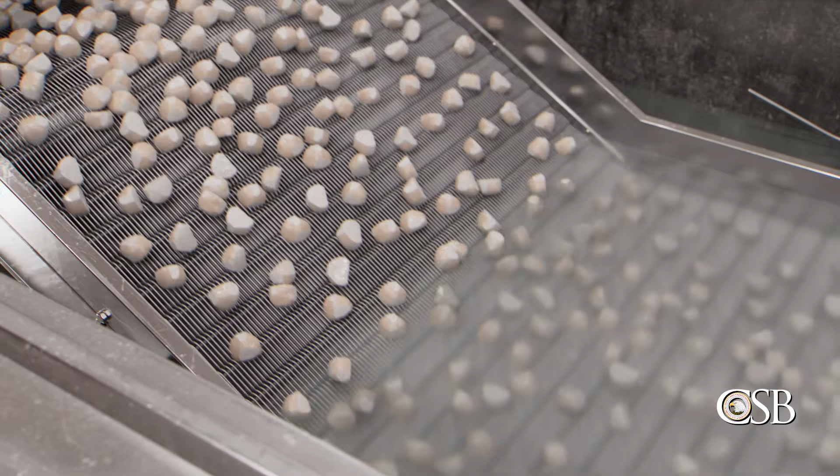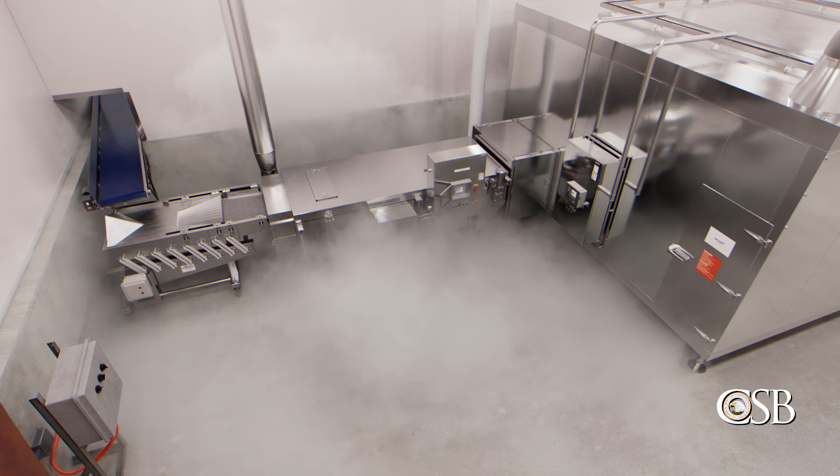January 28, 2021, the Foundation Food Group, or FFG, poultry processing plant in Gainesville, Georgia. A single part inside a liquid nitrogen freezer was bent, causing the freezer to overflow. Liquid nitrogen vaporized once it escaped the freezer, forming a deadly cloud inside a freezer room. Two people who were in the room at the time of the release died from asphyxiation.

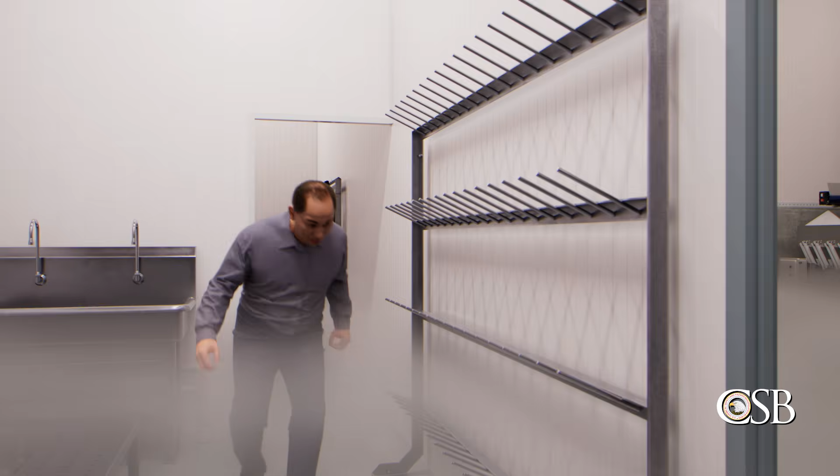Fourteen employees attempted to respond to the release. Four of those workers also died, and three were seriously injured. This preventable tragedy underscores the importance of safety leadership, systems, and training.

FFG lacked critical monitoring equipment and alarms. Management did not provide workers with adequate training or equipment to respond safely to a liquid nitrogen release.

During this incident, several workers tried to save their colleagues' lives without realizing that nitrogen had displaced oxygen in parts of the plant. While attempting to rescue their colleagues and evacuate, four workers lost their lives. In total, six workers died in this preventable incident, and three other workers and a firefighter were seriously injured.

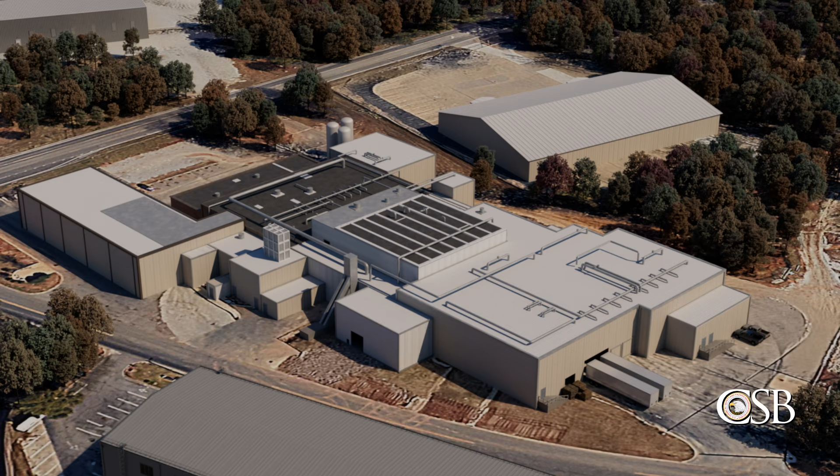Foundation Food Group owned four poultry processing plants in Gainesville, Georgia. The plant known as Plant 4 housed five production lines that made various cooked, partially cooked, and marinated chicken products. On each production line, conveyor belts transferred chicken through equipment such as ovens, fryers, freezers, and baggers.

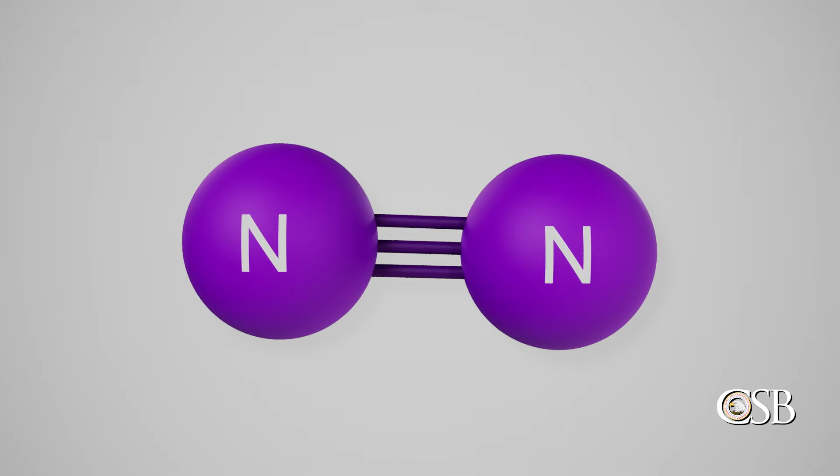Production line number 4 produced marinated, diced, fully cooked chicken that was then frozen using liquid nitrogen. Nitrogen is not hazardous in and of itself. It makes up about 78% of the air we breathe. However, too much nitrogen can reduce a space's oxygen concentration to unsafe levels.

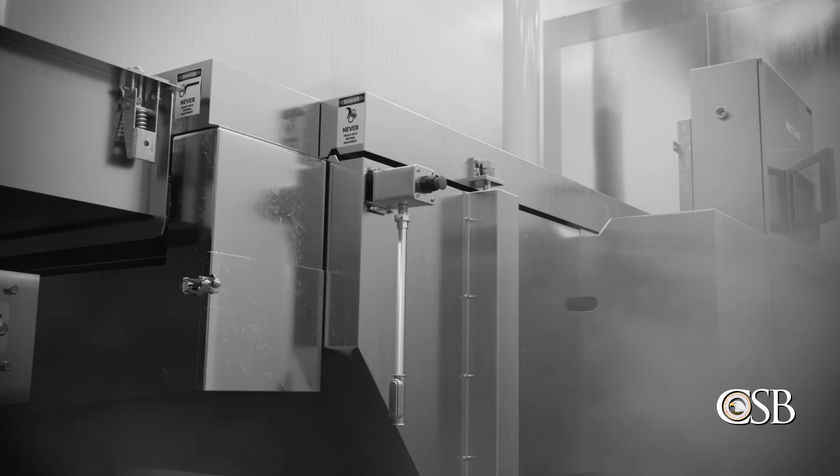When it vaporizes, liquid nitrogen greatly increases in volume. Just one gallon of liquid nitrogen can expand to roughly 700 gallons of nitrogen gas. Therefore, a large spill of liquid nitrogen can quickly vaporize, fill a room, and lower the amount of oxygen available to breathe. If the oxygen concentration is low enough, a human can lose consciousness in as little as one or two breaths. Prolonged exposure to insufficient oxygen can result in death.

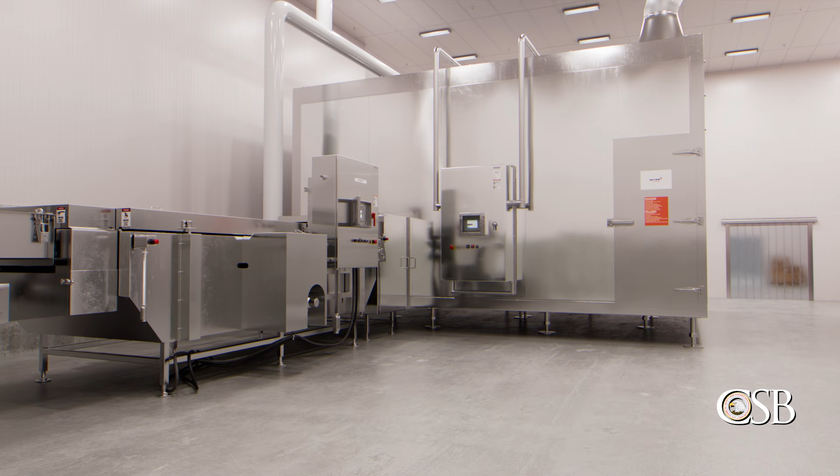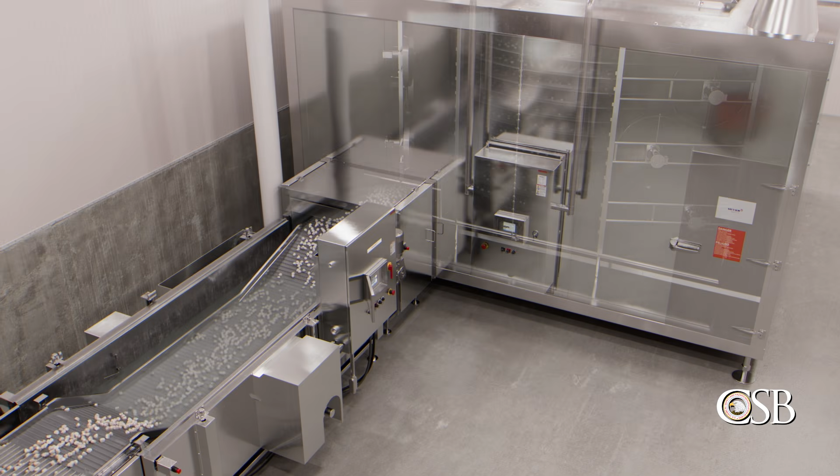At FFG, liquid nitrogen was used on line 4 in an immersion spiral freezer, which was comprised of two separate freezers connected together. First, a conveyor belt carried chicken into the immersion freezer, where it was partially frozen in a liquid nitrogen bath. Then, the chicken moved through a transition box to the spiral freezer. There, an internal fan was used to circulate vaporized liquid nitrogen around the chicken to complete the freezing process.

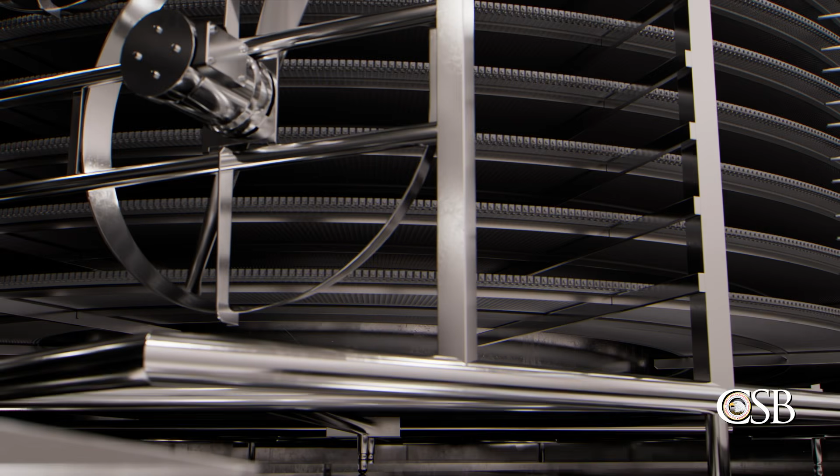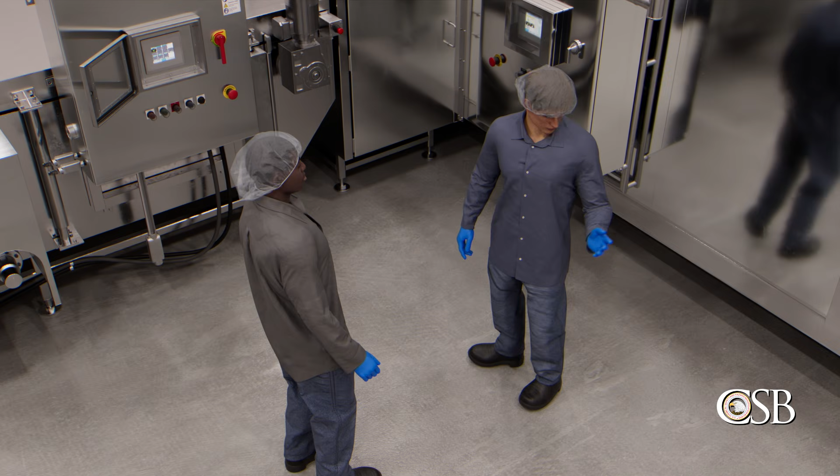The immersion spiral freezer was leased to FFG by an industrial gas products company called Messer LLC. Messer installed the freezer on production line 4 in mid-December 2020. But over the next five weeks, FFG experienced a series of operational problems with the equipment. Messer returned to Plant 4 on multiple occasions to troubleshoot those issues, which included problems with belt loading, liquid nitrogen level controls, and freezing.

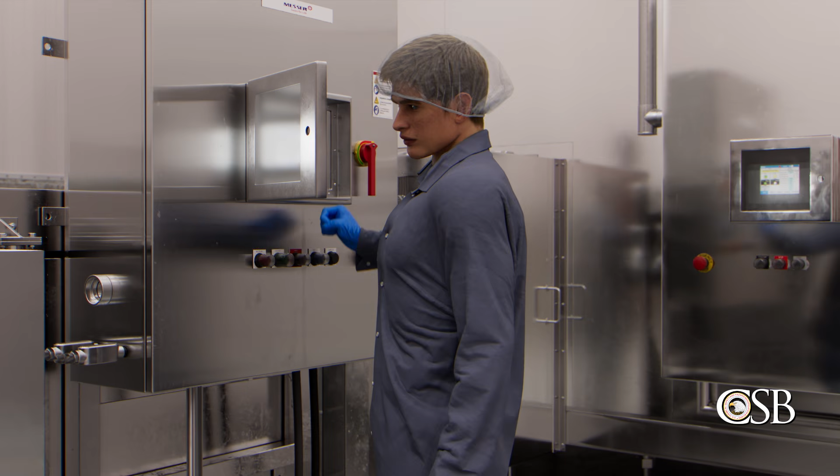But nonetheless, on January 26, 2021, FFG found that the immersion spiral freezer was still having problems. Soft, partially frozen chicken was emerging from the freezer. With Messer's guidance, FFG made several attempts to correct the issue, but two days later, the problem persisted.

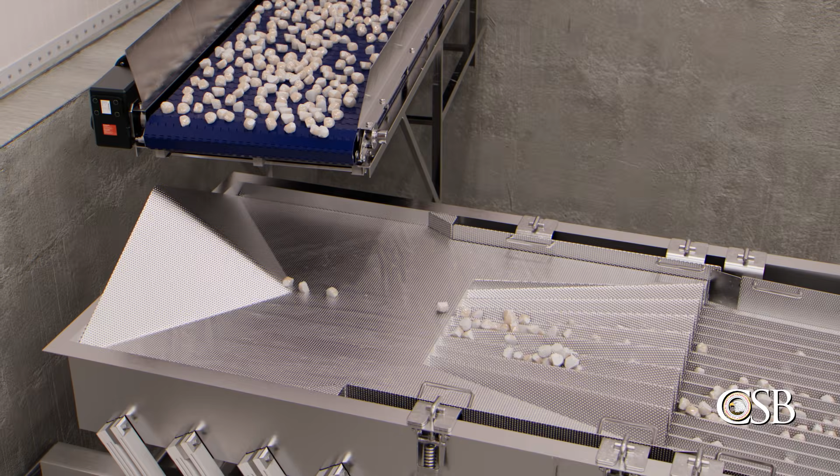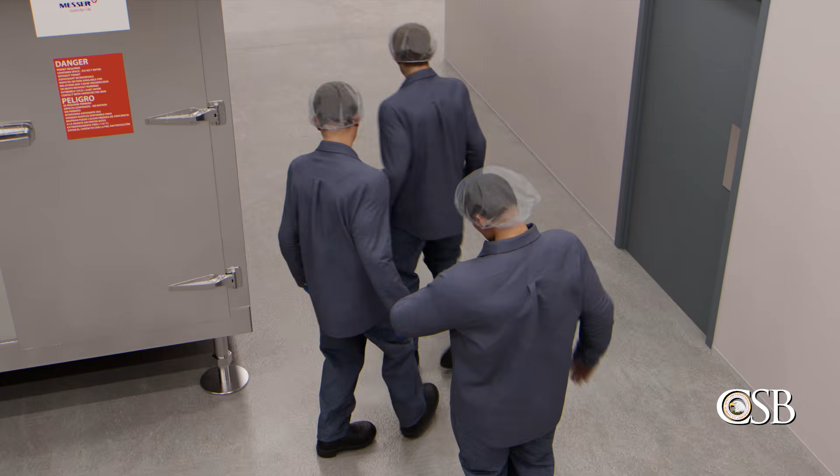At 8:14 a.m. on January 28th, FFG stopped processing chicken on line 4 so that maintenance personnel could continue to troubleshoot the issue. The maintenance workers, however, did not shut down the freezer as they performed their work. With chicken production on pause, the supervisor instructed the line 4 production workers to take a short break while the maintenance workers inspected the freezer.

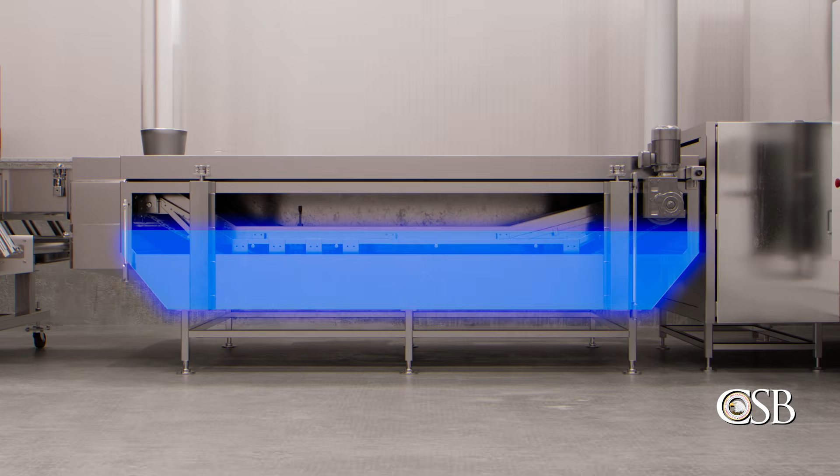While the workers were on break, the immersion freezer's bubbler tube somehow was bent. The bubbler tube was a device that measured and controlled the level of liquid nitrogen inside the immersion freezer. The CSB was not able to determine exactly how the bubbler tube became bent, but it was bent in such a way that the end of the tube was above the overflow level of the freezer.

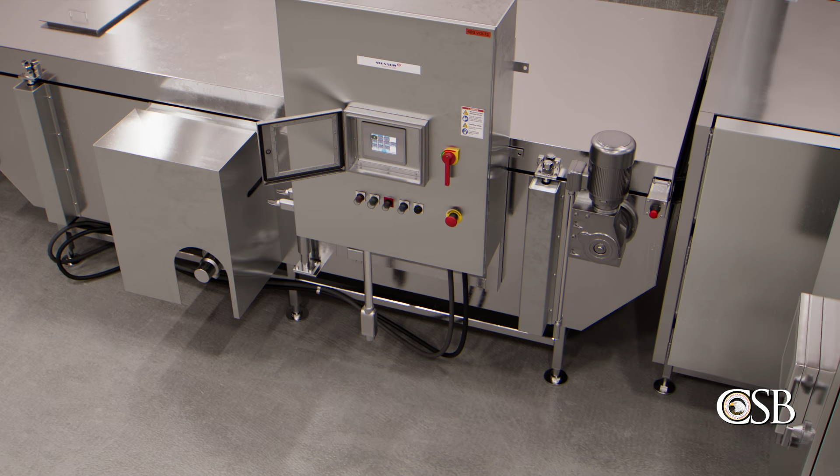This meant the end of the bubbler tube was not in contact with any of the liquid inside the freezer. As a result, the bubbler tube incorrectly reported that there was no liquid level to the immersion freezer's nitrogen level control system. The bubbler tube was the only instrument that sent data to the freezer's nitrogen level control system.

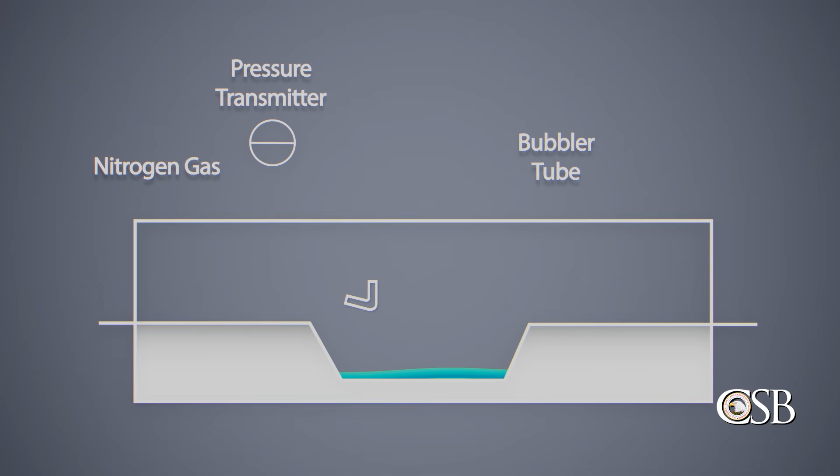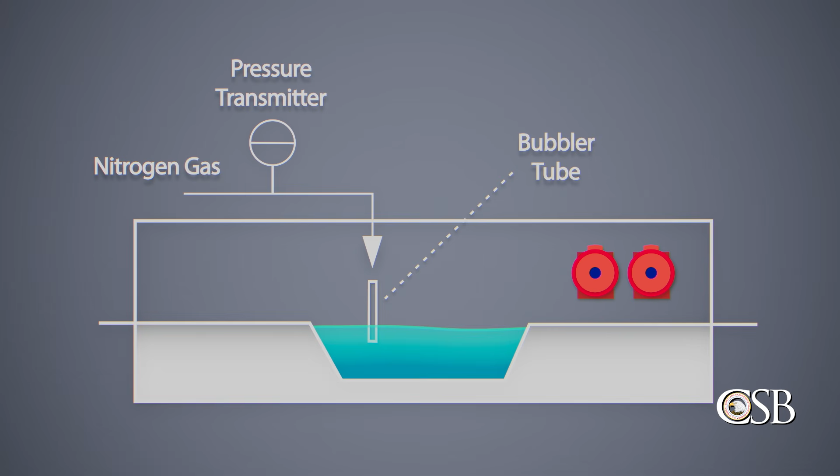Since the freezer was not shut down, its nitrogen level control system reacted to the bubbler tube's improper reading by adding more liquid nitrogen. The freezer was also equipped with a high-level safety interlock that, when activated, was designed to close valves to shut off the flow of additional liquid nitrogen into the freezer. But this safety interlock was also controlled by the bubbler tube, and because the tube could not detect any liquid, the interlock could not activate.

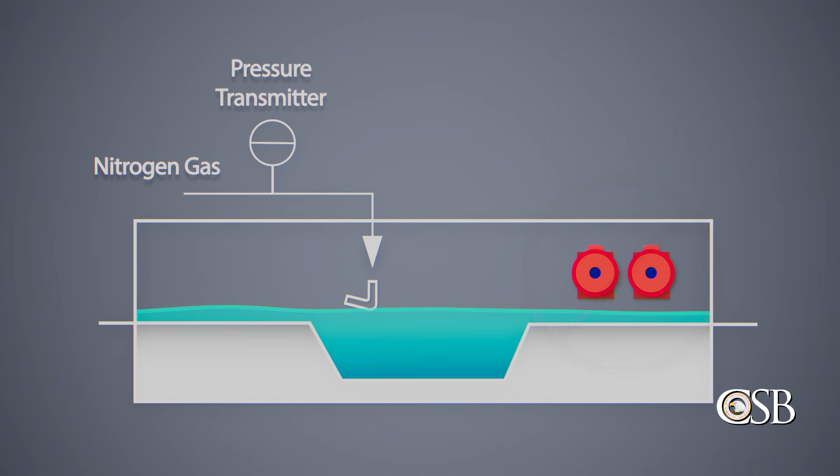Since the bubbler tube was bent above the overflow level of the freezer, it continued to measure no liquid level, even as liquid nitrogen overflowed and escaped the freezer. Once released, the liquid nitrogen vaporized and filled the freezer room with a white, fog-like cloud.

After about 20 minutes, at 8:40 a.m., the Line 4 production workers returned from their break. At this time, the workers noticed a cloud of white fog coming from the freezer room. But one of the workers told the CSB that they regularly observed white fog in the freezer room, so they did not believe there was a problem. Therefore, the uncontrolled liquid nitrogen release continued for another hour.

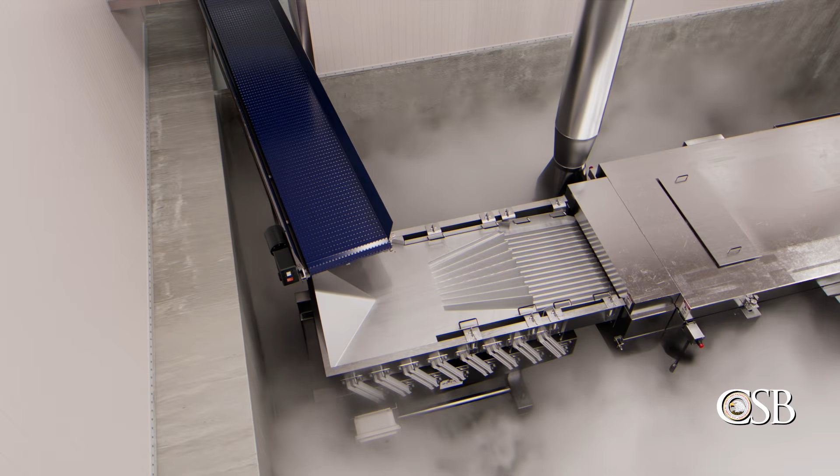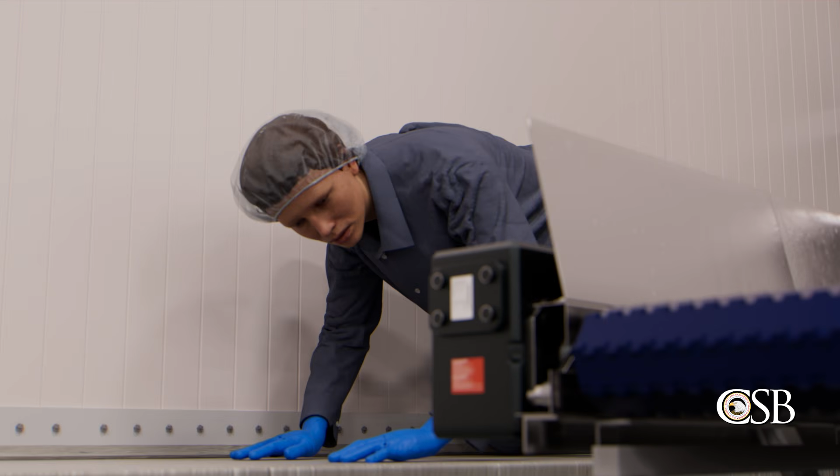Beginning to suspect something was wrong, about 9:40 a.m., a worker crawled through an elevated opening to investigate the freezer room. She saw one of the maintenance workers lying motionless on the ground, as well as a white cloud, approximately 4 feet high, filling the room. The worker reported the incident to management, who initiated an evacuation.

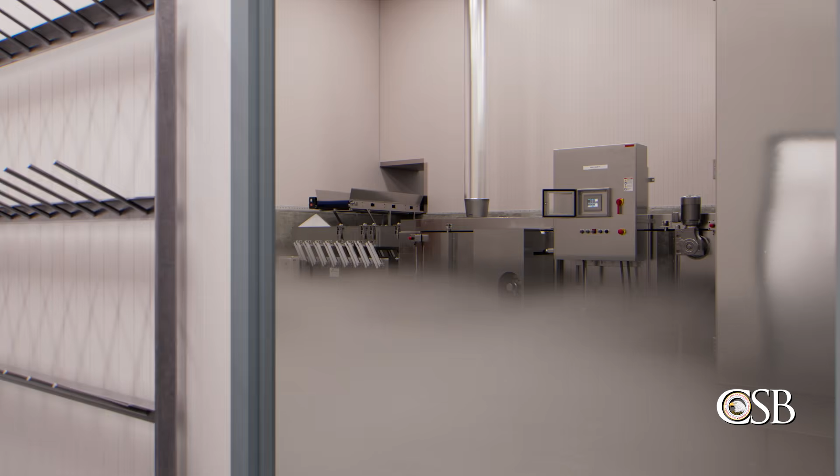But the CSB found that FFG had not trained or prepared its workforce for a release of liquid nitrogen, and workers lacked knowledge of its hazards. Therefore, during the evacuation, at least 14 other FFG employees, including members of management, responded to the incident by either investigating the freezer room or attempting to rescue their co-workers.

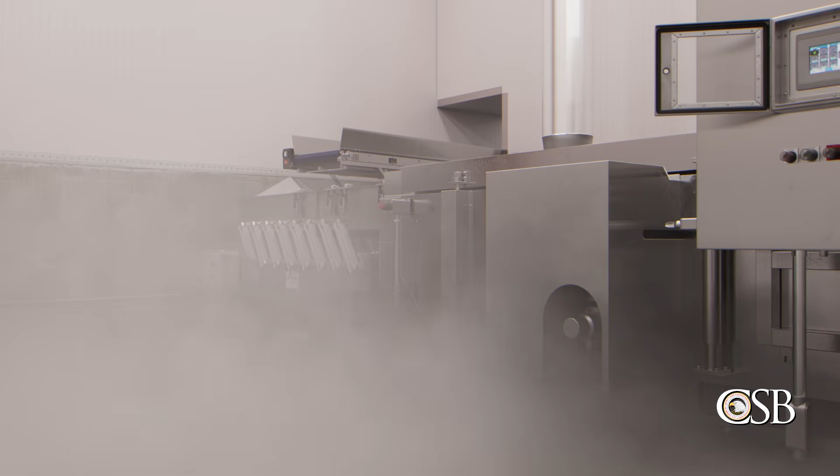The 2 maintenance workers were fatally injured by asphyxiation due to the vaporized liquid nitrogen. 4 other FFG employees were also fatally injured as they attempted to respond to the incident. Another 3 FFG employees and a firefighter were seriously injured with asphyxiation symptoms.

The CSB launched an investigation and found 5 key safety issues contributed to the severity of the incident at Foundation Food Group. They are single point of failure, atmospheric monitoring and alarm systems, emergency preparedness, process safety management systems, and product stewardship. The first safety issue found by the CSB at FFG is a single point of failure.

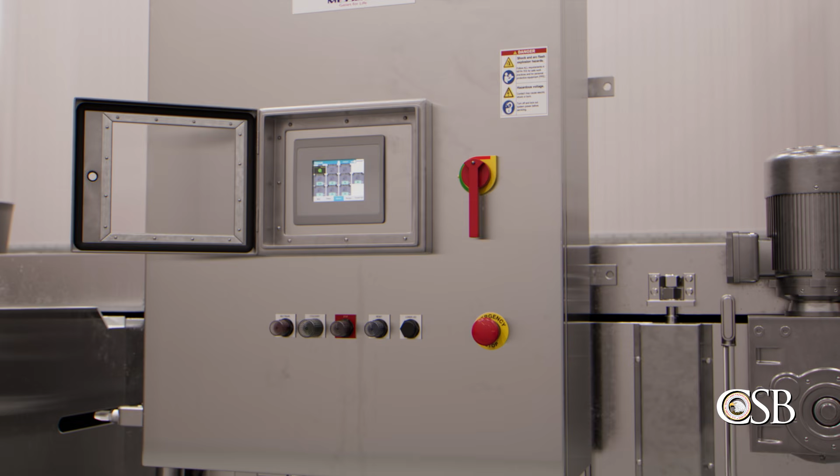The CSB learned that the immersion freezer was equipped with a nitrogen level control system. This control system maintained a consistent level of liquid nitrogen within the freezer, and the freezer utilized a high-level safety interlock designed to prevent overflow.

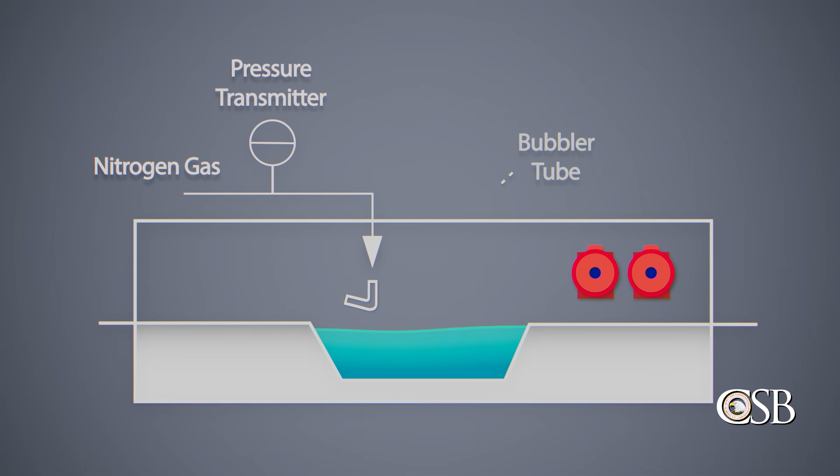But the bubbler tube was the only piece of equipment that sent measurements to both the nitrogen level control system and the high-level safety interlock. Therefore, once the bubbler tube was bent and measured no liquid in the freezer, these 2 pieces of safety equipment were unable to work as intended.

At FFG, the failure of a single component resulted in 6 fatalities. Companies must ensure that processes and equipment handling hazardous chemicals are robust so that one failure does not result in a catastrophic incident. During its investigation, the CSB found that the team that designed the immersion freezer did not fully consider the consequences of the bubbler tube failing.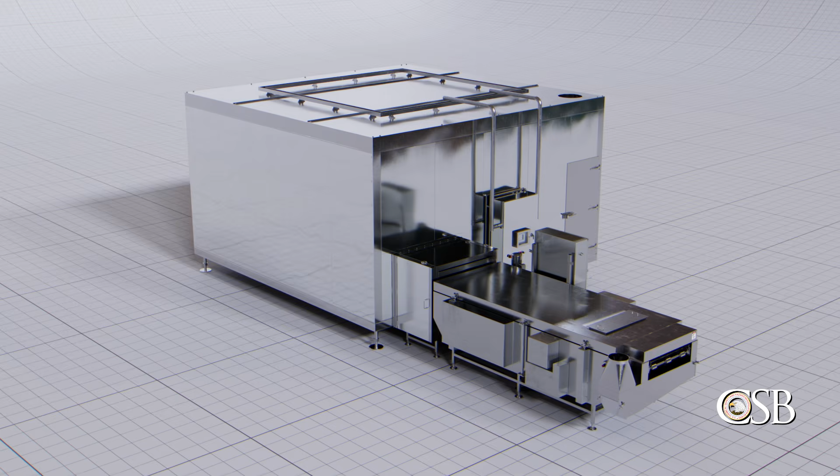As a result, the design team did not install any other safeguards that could prevent an overflow should the bubbler tube fail. Regardless of how the level control system failed, relying upon a single layer of protection to guard against a multiple fatality incident is not sound safety design.

The second safety issue identified by the CSB is a lack of atmospheric monitoring and alarm systems. Once a release occurs, atmospheric monitoring and alarm systems are essential for preventing people from entering unsafe environments. There is abundant industry guidance on the importance of atmospheric monitoring when the potential for hazardous atmospheres exist.

The CSB learned that Messer informed FFG of the need for atmospheric monitoring of its liquid nitrogen processes on at least 3 occasions. But the CSB found that neither Messer nor FFG ever installed any atmospheric monitoring equipment in the freezer room where the hazardous release occurred.

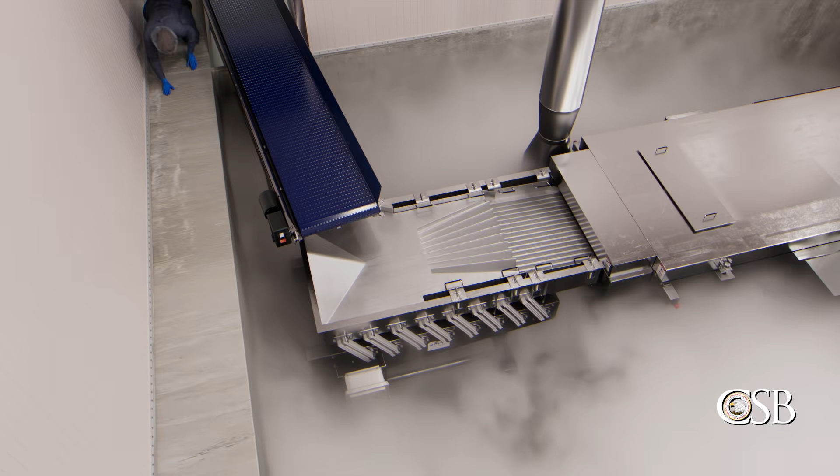As a result, many personnel were unaware that the freezer room was unsafe to enter on the day of the incident. Without atmospheric monitoring, an oxygen-deficient atmosphere cannot be reliably detected. Many of the responding FFG employees likely had no idea they were walking into a hazardous atmosphere.

Facilities that handle hazardous gases or cryogenic asphyxiants, like liquid nitrogen, should have a functioning atmospheric monitoring and alarm system based on a properly conducted risk assessment.

The third safety issue found at FFG concerns emergency preparedness. Effective emergency preparedness can reduce the consequences of a catastrophic incident, but the CSB found no evidence that FFG had any formalized policies or procedures for responding to a liquid nitrogen release.

The company did not train its employees on how to recognize or respond to such a release, and did not equip them to safely respond. Therefore, when the release occurred, the workers did not understand the danger of entering the freezer room, and they lacked any equipment or PPE that would have enabled safe entry into the freezer room once the incident began.

As a result, after the discovery of the first 2 deceased workers, 4 other employees who entered the freezer room also died, and 3 additional employees responded and were seriously injured. Companies handling hazardous materials have an obligation to train and inform their employees.

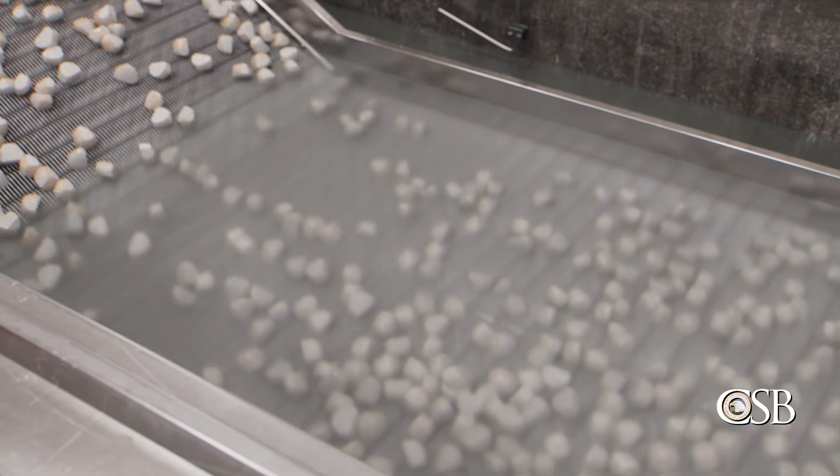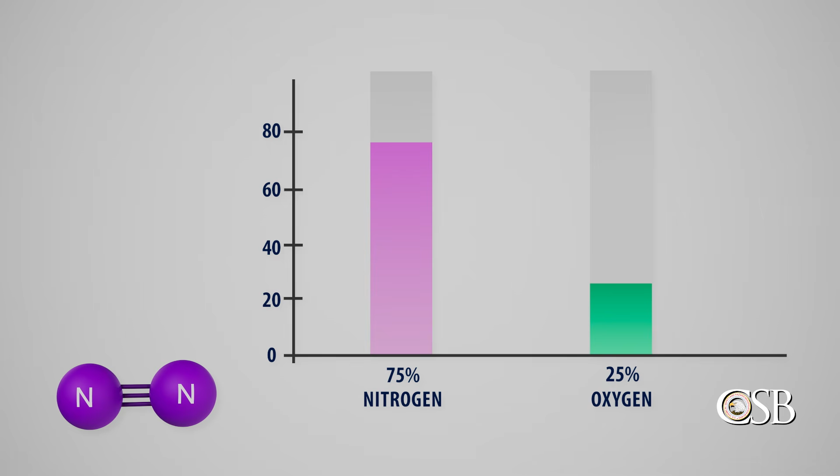The CSB notes that there is abundant industry guidance concerning the proper handling and safety management of cryogenic asphyxiants like liquid nitrogen. But none of these requirements and guidelines are currently enforceable by regulation. That is because OSHA and the EPA do not define liquid nitrogen as a highly hazardous chemical or extremely hazardous substance. Therefore, neither OSHA's Process Safety Management Standard nor EPA's Risk Management Program rule applies to liquid nitrogen processes. That is the case even though uncontrolled liquid nitrogen releases have resulted in serious injuries and fatalities in several industries.

Food manufacturers are not immune from chemical hazards and process safety risks. When an organization introduces a hazardous chemical into its process, it should implement robust process safety management practices to effectively control the risks, regardless of whether a regulation requires it.

If FFG had an effective process safety management system, this incident could have been prevented. But the CSB also believes that there is a need for a specific enforceable regulation of cryogenic asphyxiants, such as liquid nitrogen, so that companies are required to act where FFG did not.

As a result, the CSB recommended that OSHA promulgate a standard on the prevention and mitigation of hazards arising from the storage, use, and handling of cryogenic asphyxiants like liquid nitrogen, and develop and publish a guidance document for process safety management practices applicable to processes handling compressed gases and cryogenic asphyxiants.

Finally, the fifth safety issue found by the CSB at FFG is product stewardship. The owner and operator of a hazardous process is ultimately responsible for the safety of its processes, the facility, and the people who work at the facility.

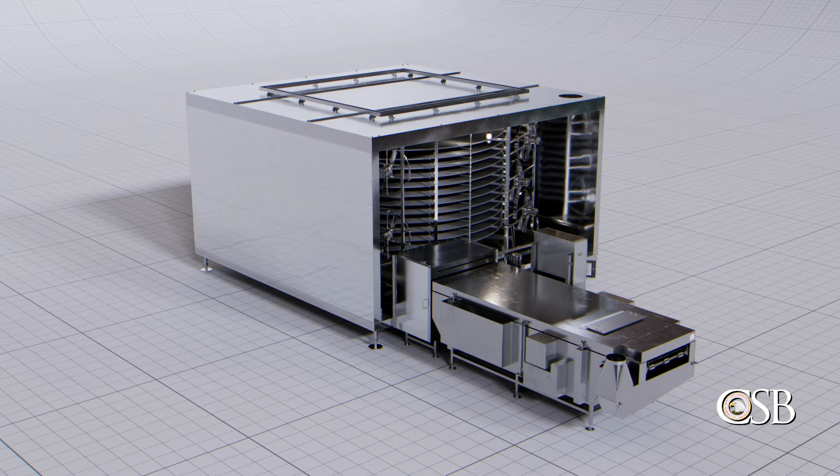In this situation, Messer owned the Line 4 immersion spiral freezer, as well as the bulk storage tanks that fed liquid nitrogen to the freezer, and leased the equipment to FFG to operate. When the owner and operator of a process are two different companies, responsibility for safety should be shared. Despite FFG's poor safety practices, Messer had the expertise, ability, and opportunity to take effective action to prevent this incident.

The CSB learned that as early as 5 months prior to the incident, Messer discovered and communicated to FFG several safety concerns regarding the freezer. Those concerns were about the risks posed by the freezer's location, inadequate room ventilation, defeated freezer interlocks, and the absence of atmospheric monitoring. But nevertheless, Messer continued to supply FFG with liquid nitrogen despite FFG's failure to correct the issues.

Large industrial gas suppliers, like Messer, are often much more knowledgeable about the hazards of their products than their customers are, as was the case between Messer and FFG. Despite this, and despite Messer's direct knowledge of FFG's unsafe practices, Messer continued its business relationship with FFG. Like FFG, Messer had multiple opportunities to prevent this incident.